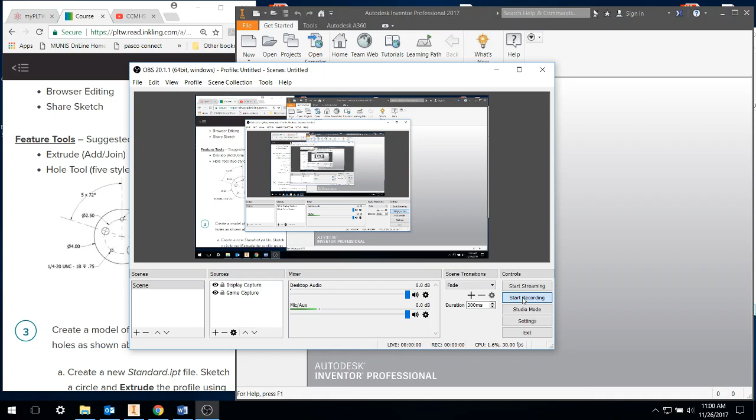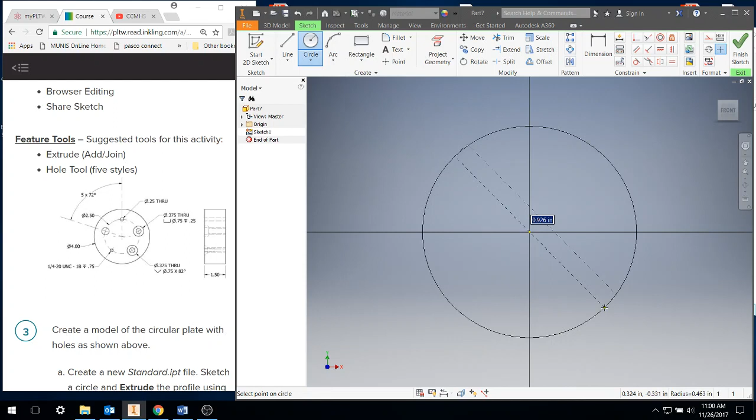Okay, now we're going to work on 5.5a, hole practice. We're going to draw a plate, diameter of 4, thickness of 1.5, new, standard IPT, create. Start 2D sketch, XY plane, circle, click in the center, type in 4, hit enter, finish sketch, extrude.

1.5. So we have our plate.

So we're going to start creating points now on that. We're going to go start 2D sketch, grab the front surface, come over here to point. You're going to put your cursor about where you want it, but we're going to actually type it in. So if you hit tab, it's going to start with our X. We want it 0, 0. And for a Y, we want 1.25. We're going to hit enter.

Right click OK. Now we're going to grab this circular pattern right here. I like to rotate my drawing just a smidgen. The geometry, we're going to do this point. For the axis, we're going to go around there.

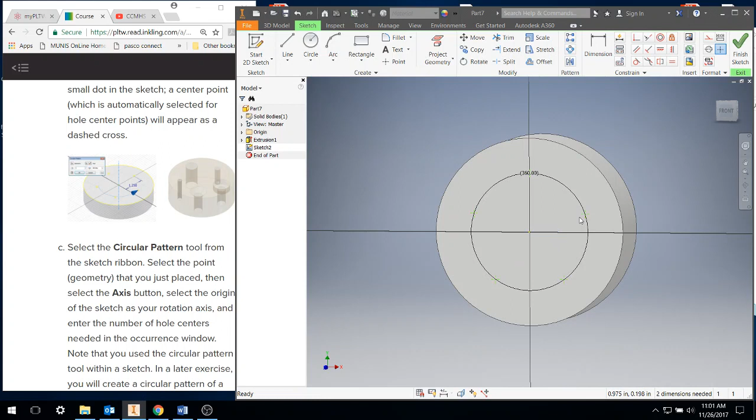So we're going to do 5. Hit OK. So we have our stuff. We're going to finish sketch. First thing we're going to do is our first hole now.

Going to do different holes throughout. This is going to be a through hole. So I'm going to select hole. I'm going to grab up here. It automatically grabs all the holes, assuming one the same.

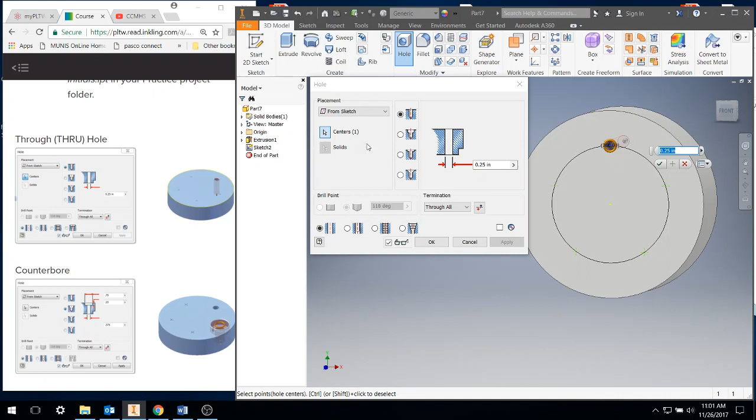However, we do not. So I'm going to hold down Control on my keyboard, and then I'm going to select the circles that I do not want to draw through right now. It's actually deselecting, so it goes ahead and does that. So here I want a through hole of 0.25.

It goes through all. I'm going to click OK. All right. You notice that it just consumed our sketch. We've lost our other 4 circles. What we're going to do is we're going to come up here, click on hole in our browser, right click on sketch 2, and we're going to hit share sketch.

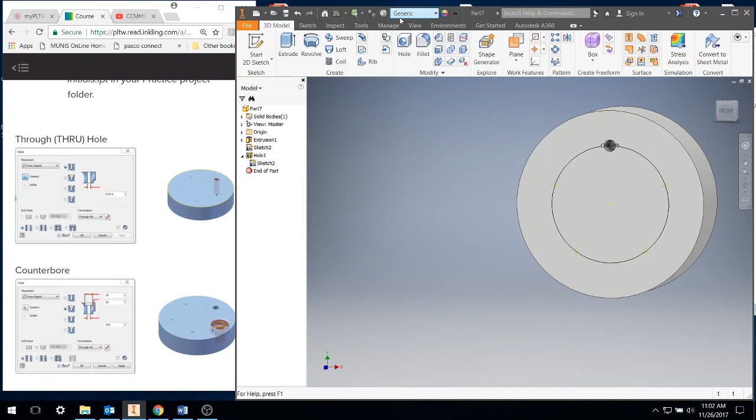This is going to allow us to get some more, use those other holes. So for the second hole, we're going to do a counter bore. Click on hole. It says, hey, you want to grab all 4 of those. Hold down Control. Deselect the ones you don't want.

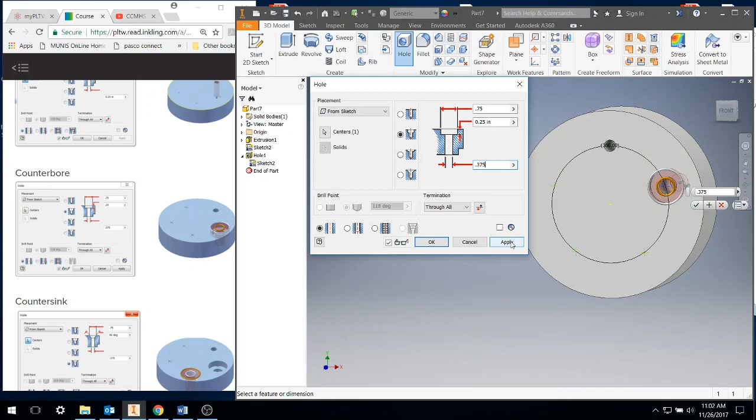We're going to go to the counter bore. See right here, 0.75, 0.25, and 0.375. Through all. We're going to hit apply instead of OK. That's going to allow us to keep working our way around. So hit apply.

All right, now it says for the next hole we want to do a countersink, which is this bottom option. So we're going to deselect, holding down Control, clicking on the points. Deselect that one. We're going to go to the countersink. We're going to actually go 0.75, 82 degrees, and 0.375. So this is going to give us that tapered look into it.

Going to hit apply. Now for our next hole, we're going to do a tapped hole. So it's going to have threads. We're going to deselect this one by holding down Control and clicking on it. So through hole, we're going to click down here for tapped, and that's going to bring up the thread menu.

And the first time you do it, usually takes a minute or two to go ahead and load up the menu.

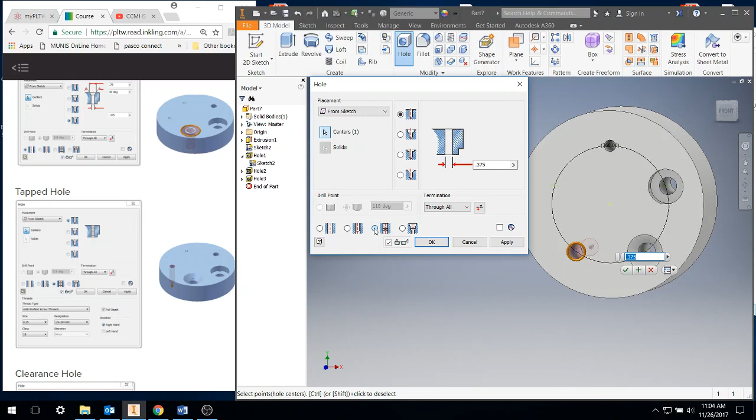Okay, so we actually want a 1/4 inch. I'm going to go 1B, 1/4 20. Diameter through all. We're good. We're going to click apply.

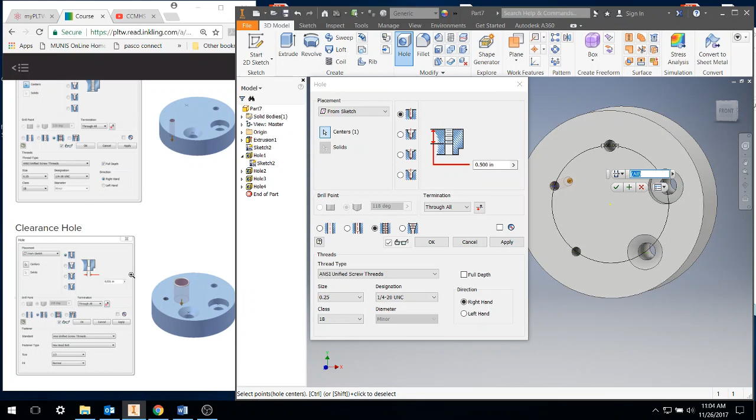And we're going to do our 5th hole, which is a clearance hole. So that's here and here, here and there. Another little menu it has to load. Patience is a virtue.

I'm going to go to hex head bolt, size 1/2 inch, normal, through all. We're going to hit OK. So now we have our holes.

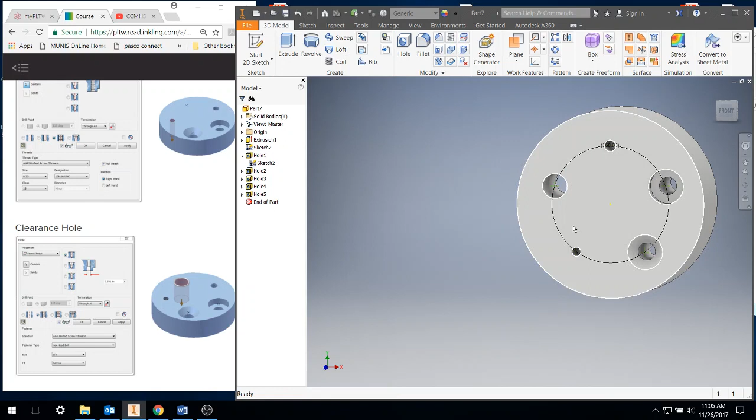Let's go ahead and change the thing. Actually pick gunmetal, I think. It made a nice contrast.

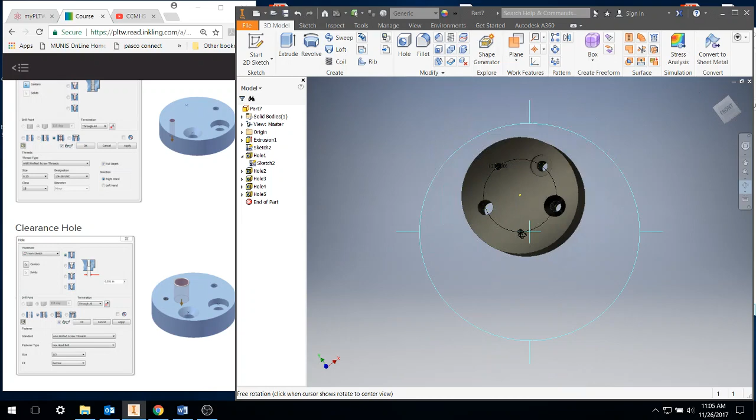So if we zoom in and check, you can see where stuff is tapered, where we have our counter bore, just a regular through hole. Come over here and look at the threads in this one over here, as well as the clearance hole right there. So we are good to go.